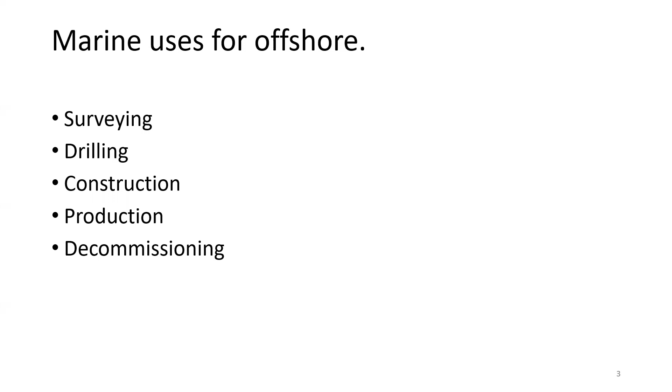These uses result in physical presence and physical disturbances. Physical presence, where physical objects associated with offshore projects consist of a range of surface and subsurface structures and vessels. Surface structures may include drilling units, semi-subs and jackups, drill ships, fixed platforms, FPSO vessels, floating storage and regasification units, and floating liquefied natural gas facilities.

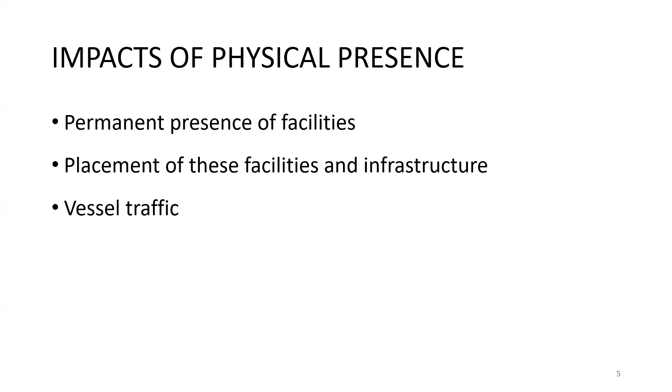Subsea infrastructure may include pipelines, risers, flow lines, umbilicals, manifolds, and Christmas trees. And vessels, project-related vessels, may include survey vessels, seismic, geotechnical, barges, tugs, support heavy lift and anchor handling vessels, and intervention vessels, and trenching and pipe laying vessels.

So the impact of physical presence, right? Permanent presence of facilities or infrastructure. Impacts may occur from the permanent presence of facilities and infrastructure over the life of a development and during removal of infrastructure during decommissioning.

Placement of these facilities and infrastructure may require anchoring to the seabed, or in the case of a fixed structure such as a platform, installation of foundations, either of which would result in the temporary or permanent loss of habitat.

Vessel traffic may be present throughout a project and may include a range of movements to and from a project area. The increase in vessel traffic may increase the risk of collision and obstruction to others.

The potential environmental impacts and risks associated with the physical presence of vessels and equipment include increased suspended sediments and sedimentation, disturbance to or loss of benthic seafloor habitat and associated biota, creation of artificial habitat and/or modification of existing habitats, introduction of marine invasive species, and disturbance to marine archaeology.

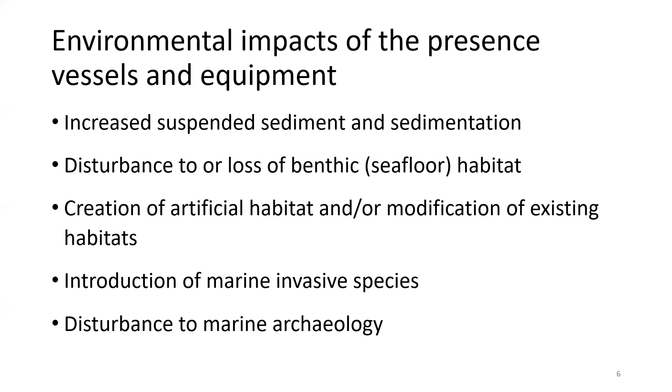Disturbance to migration, feeding, and breeding patterns of species, and deviations to migration pathways; visual aesthetics impacts to seascape resulting in social and cultural impacts; vessel interaction with marine fauna, for example vessel strikes, and interaction with other marine users that may lead to potential displacement.

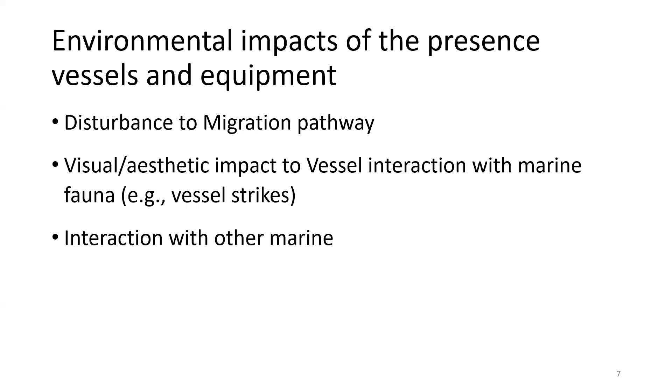So mitigation management measures, right? Mitigation management measures and performance standards applicable to the management of physical presence include considering sensitive marine habitats and life cycle periods for relevant species and communities during the site selection and design stages.

Undertake benthic habitat surveys to identify sensitive habitats and biota, and where feasible, avoid these areas, and minimize physical footprint where feasible.

Consider potential impacts for offshore structures. At an early stage, consider potential impacts for offshore structures, both positive and negative.

In some cases, restoration may be needed to assist the recovery of damaged or destroyed habitat, or offset considered. Examples are the introduction of artificial or transported habitats, reefs, and the relocation of individual coral colonies.

Dynamic positioning: consider dynamic positioning on drill rigs to avoid or minimize the need for anchors. Develop exclusion zones in consultation with key stakeholders, including local fishing communities. Raise awareness of exclusion zones with all stakeholders.

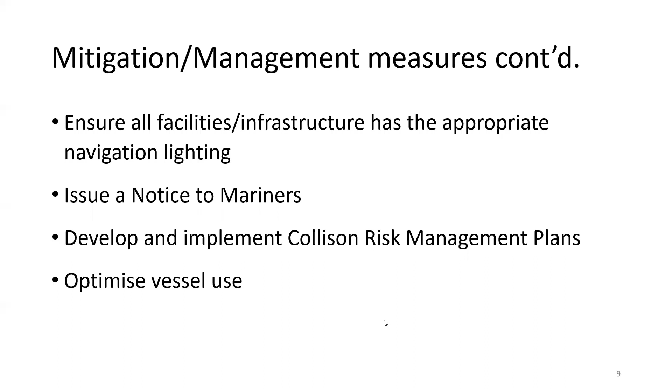Physical disturbance: dredging, trenching, and rock dumping. Dredging and pipeline trenching involve the removal of sediments and debris, typically during the construction, installation, and commissioning phases of the project. Maintenance dredging can also be required over a project's life cycle, most likely in small quantities.

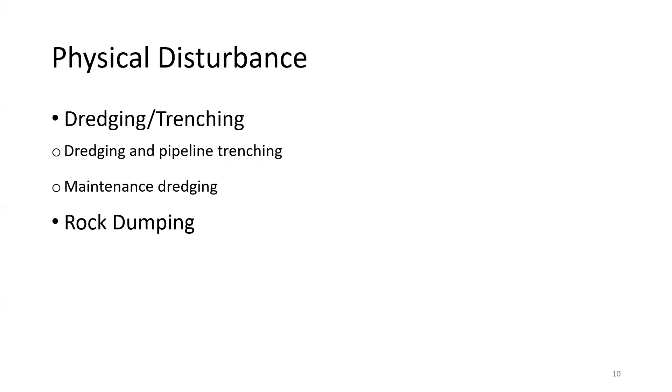The material collected during dredging is known as spoil and is usually disposed of offshore. Methods include grab dredging, backhoe dredging, trailing suction hopper dredgers, water injection dredgers, and seabed leveling.

Dredging can occur in a diverse range of environments involving a range of sediments. In areas remote from pollution sources, sediments are unlikely to contain contaminants, while in ports and harbors adjacent to urbanized or industrial areas, sediments may contain high levels of contamination from metals, hydrocarbons, and synthetic organic compounds.

Some marine environments are also more sensitive to dredging impacts and require a higher level of protection, for example coral reefs and/or fish nurseries.

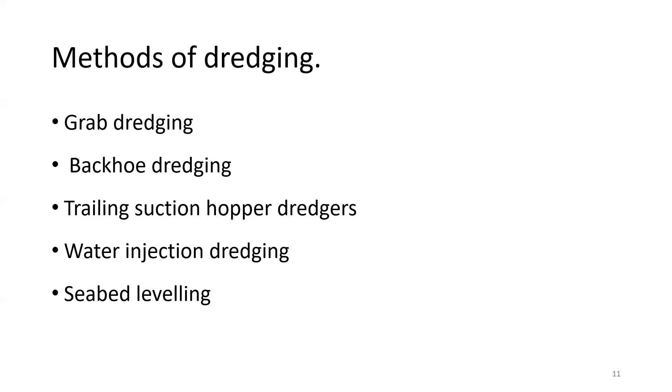Dumping. What is dumping? Dumping is a method used to stabilize or protect pipelines, or may be used to stabilize locations for placement of jackup rigs.

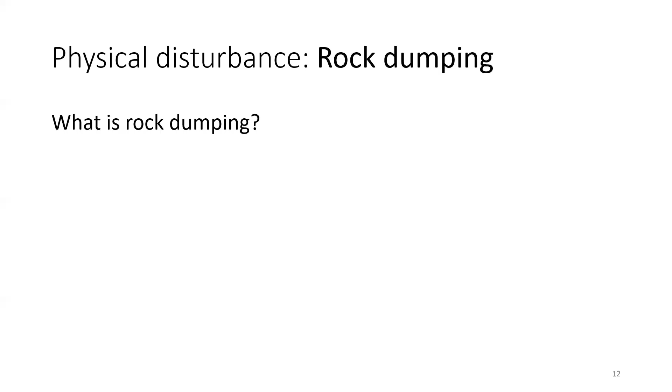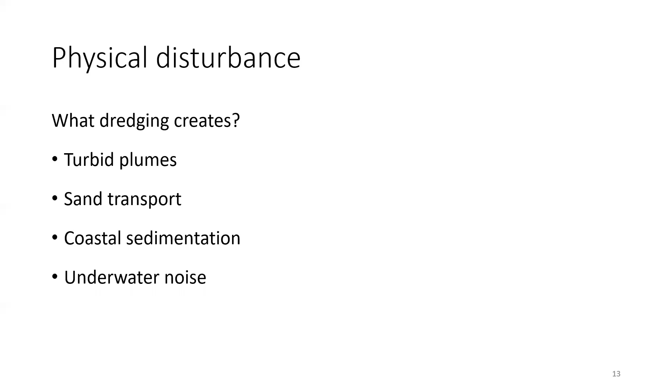Dredging, trenching, dumping, and the offshore disposal of dredge spoils creates turbid plumes, sand transport, coastal sedimentation, and underwater noise.

The potential environmental impacts and risks associated with physical disturbances include habitat modification, removal, and destruction of sensitive marine habitats, increase in suspended sediments resulting in the burial of sessile flora and fauna, and interfering with local prey and altering the movement of larval fish.

Increase in sedimentation or placement of materials, resulting in burial of sessile flora and fauna, alteration of the hydrodynamic processes, reduced productivity of fisheries, and noise impacts.

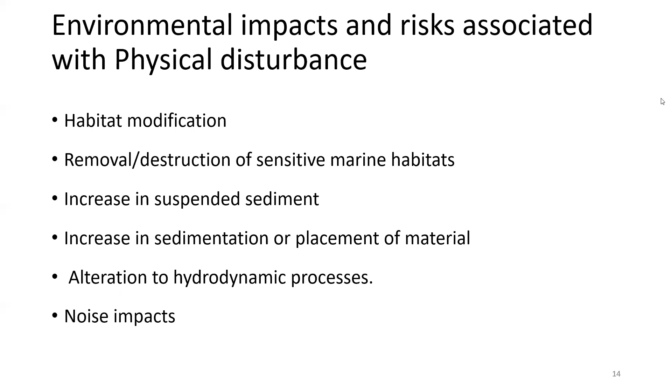So some mitigation methods include considering sensitive marine habitats and life cycle periods for relevant species when determining the placement and timing of dredging zones during the site selection and design stage.

Reduce footprint, footprint duration, and volume of dredging, rock dumping, and dredge disposal to the minimum required.

Establish a dredge management plan that outlines measures to minimize impacts and suitable management responses when trigger values for marine water quality are exceeded, and develop plans for exclusion zones in consultation with key stakeholders, including local fishing communities. Raise awareness of exclusion zones with all stakeholders, and obtain permits for approved disposal routes.

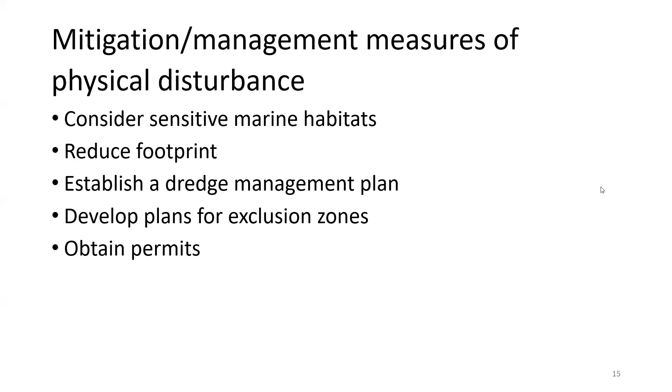Okay, so emissions. Emissions such as acoustic emissions are emissions that are underwater noise and underwater vibrations.

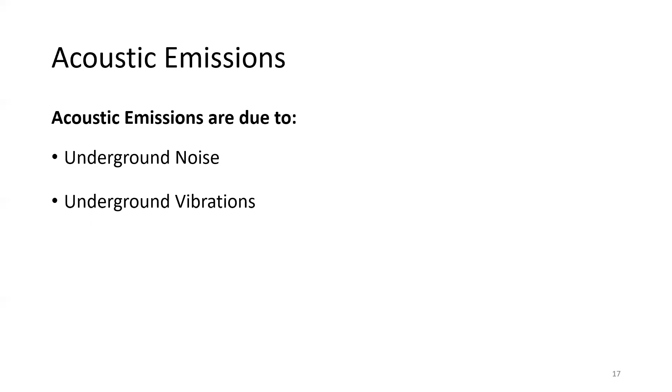Underwater noise in the oil and gas industry comes from exploration. This is where noise is generated from seismic survey and geophysical surveys. This creates high energy pulses of low frequency sound.

Construction. This is the noise created due to piling, dredging, and trenching.

Drilling and production. This is the noise generated due to ground vibration when setting up offshore rigs, such as semi-submersible rigs, jackup rigs, and drill ships. Drill ships make the most noise compared to platform rigs. Mechanical vibration is also created due to drilling underwater.

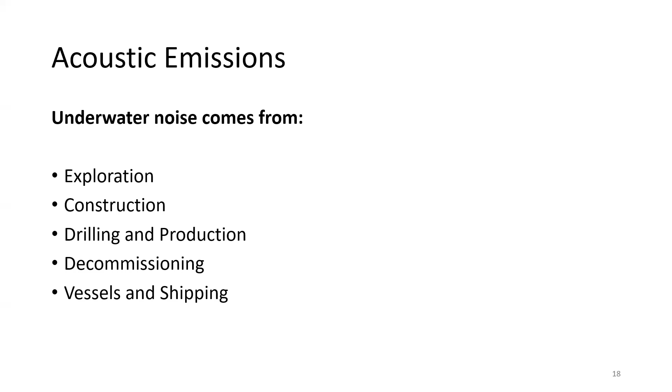Decommissioning. This is the noise created by vessel propulsion and positioning. Vessels and shipping. This is noise generated by machinery on the vessel, such as generators, engines, pumps, etc.

The environmental impact to marine fauna due to underwater noise includes behavioral changes. These are changes that include temporary changes in swim behavior or direction, cessation of vocalization, changes to breathing, and changes to migratory regimes. Auditory interference - masking or interfering with other biologically important sounds such as communication, echolocation, and sounds produced by predators or prey.

Auditory impairment - permanent or temporary impairment to hearing organs.

Mitigations of acoustic emissions are: consider sensitive locations and time of year when planning seismic activity, utilize marine mammal observers for sensitive species in the area, use passive acoustic monitoring in highly sensitive areas, and use soft start procedures for piling operations and dredging.

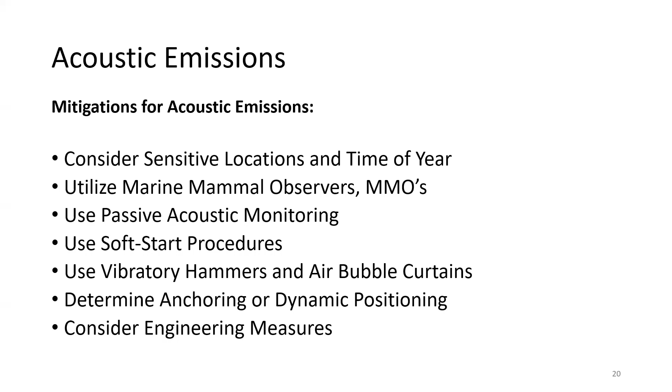For pile driving, consider the use of vibratory hammers and air bubble curtains. Assess whether anchoring or the use of dynamic positioning would be more appropriate for maintaining a ship's position. Consider engineering measures to minimize operational noise emissions.

So now I'll go to combustion emissions. Combustion emissions occur from offshore activities such as electric power generation, machine drivers for compression and pumping, gas flaring, vessel activity, and helicopters.

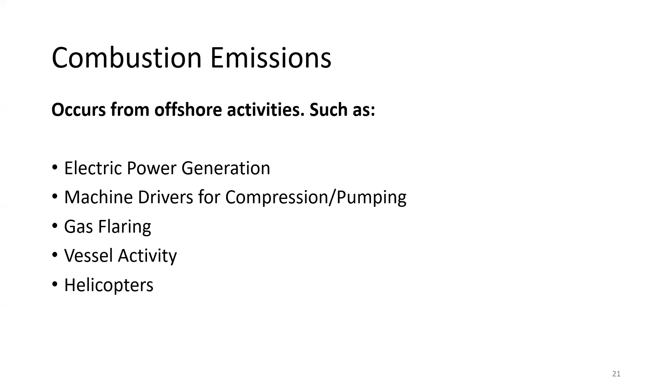Environmental impacts are due to carbon dioxide, which is a greenhouse gas that contributes to climate change and ocean acidification. Nitrogen oxides contribute to acid rain and may also contribute to ozone formation when mixed with volatile organic compounds in sunlight. Nitrous oxide is a greenhouse gas that contributes to climate change.

Sulfur dioxide contributes to ocean acidification and acid rain. Carbon monoxide can be oxidized to carbon dioxide, but is primarily a local air pollutant that can be toxic at high concentrations. Methane is a greenhouse gas that contributes to climate change. It also contributes to low-level ozone formation.

Volatile organic compounds, or VOCs, can promote the formation of photochemical oxidants and contribute to climate change.

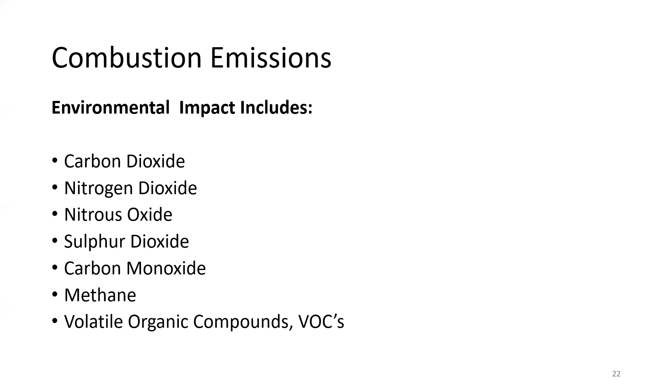Mitigations for combustion emissions are the use of high efficiency equipment to minimize power demand, life of field planning, selecting low sulfur diesel, and power generation plants incorporating low emissions technology as a standard. Small combustion process installations should be designed to meet the emissions guidelines. Integration of renewable energy sources into developments.

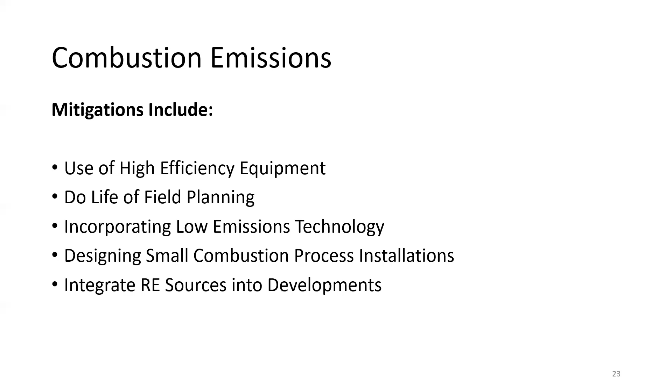Consideration of electrification versus direct drive when designing projects. Do regular plant maintenance, and implement emissions control devices on vehicles and machinery.

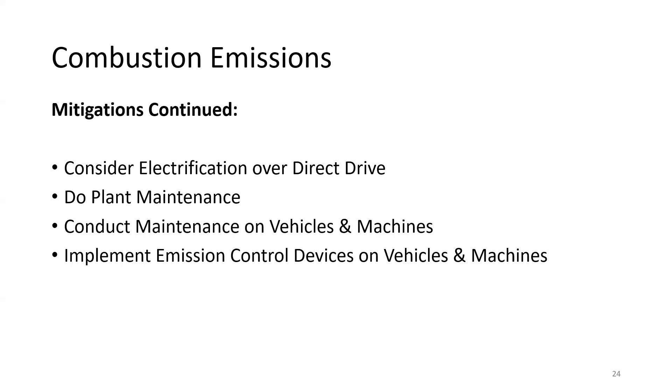Next I will go to fugitive emissions. These include emissions targeted by operating facilities as part of their leak detection and repair survey programs, with particular focus on valves, flanges, pumps, connectors, and compressors. The environmental impact contributes to global warming, since most fugitive emissions are methane.

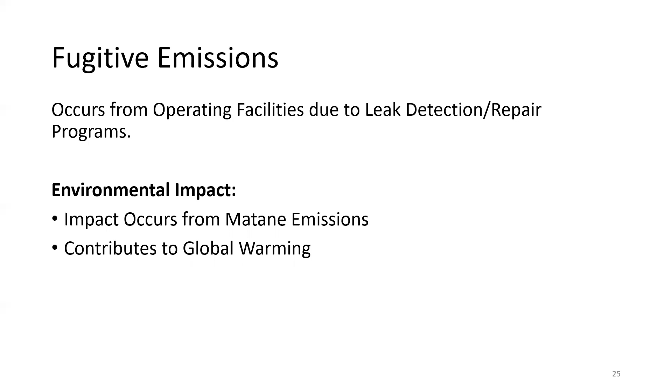Mitigations for fugitive emissions include selection of appropriate valves, flanges, fittings, seals, and packings, considering equipment safety and suitability requirements, as well as their capacity to reduce gas leaks and fugitive emissions, implementation of effective and regular leak detection and repair programs, and ensuring new systems or processes do not use chlorofluorocarbons.

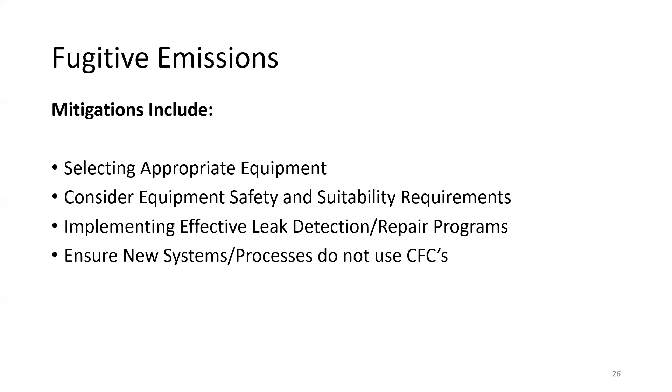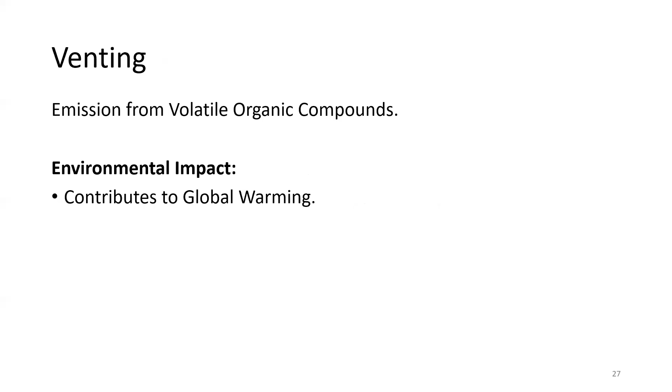Next, I will go on to venting. These are emissions from volatile organic compounds, or VOCs. The environmental impact is emissions from venting, which contributes to global warming.

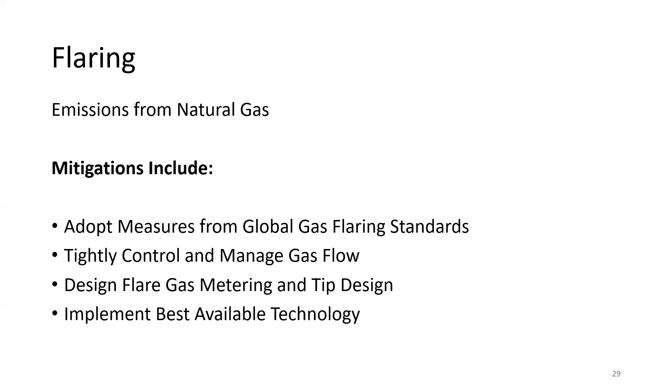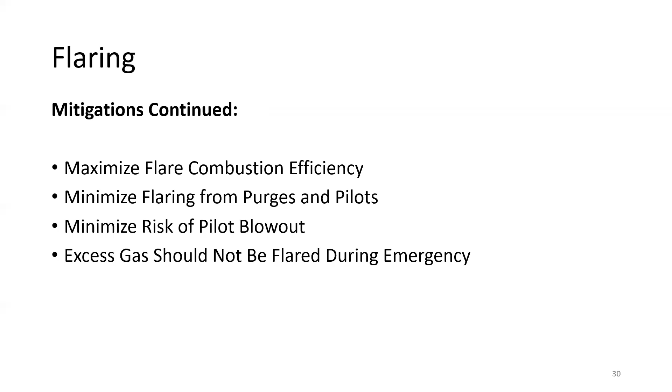Minimize flaring from purges and pilots. Minimize risk of pilot blowout by ensuring sufficient exit velocity and providing wind guards. In the event of an emergency or equipment failure, excess gas should not be flared, but sent to an efficient flare gas system. I will now pass you on to Justin Sinat, who will discuss offshore discharges.

Hi, good day. I'll be doing offshore discharge, so let's get to it. Next slide.

So we have sewage, grey water, and food waste. This can be found in showers, toilets, and kitchen facilities. The effects on the environment can include changes to ambient water quality. This can increase the BOD, the biological oxygen demand, biostimulation of planktonic communities, and biological exposure to pathogens, which can also decrease water quality and decrease sediment quality due to sediments and solid food waste.

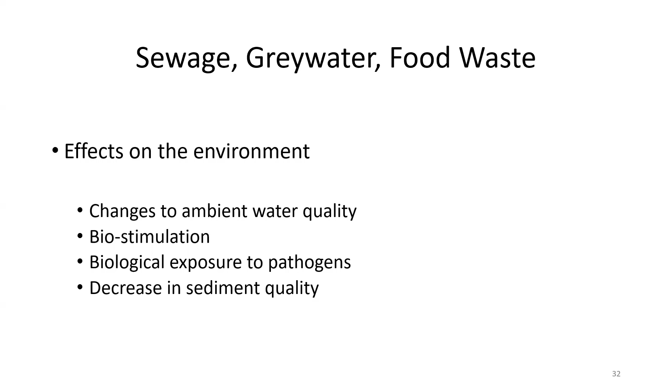So the mitigation: water should be treated according to MARPOL Annex 5. And the sediments in the food waste especially should be less than 25 millimeters before discharging into the marine environment.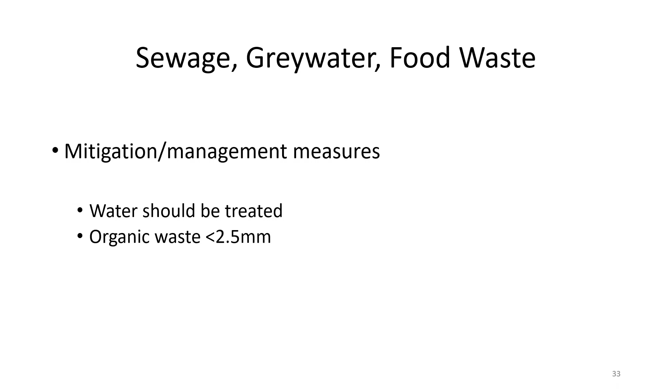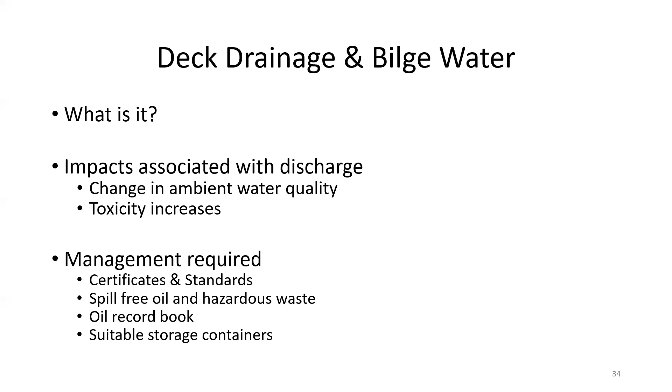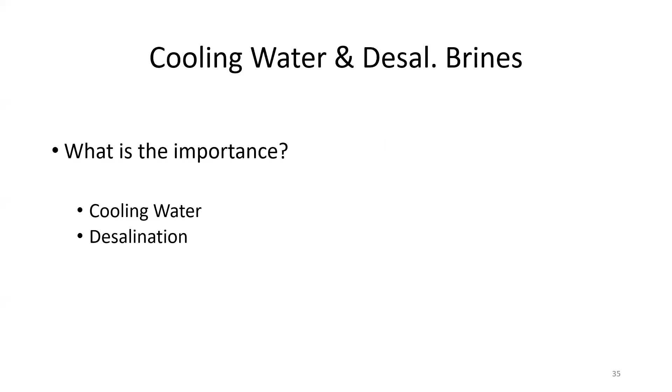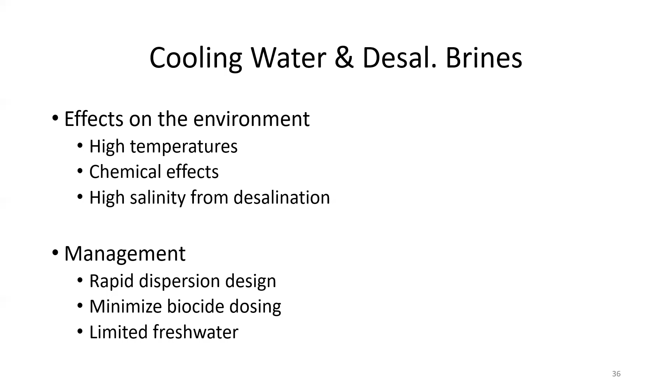Management: we have rapid dispersion designs, so when designing systems, we want to make sure that when released into the environment, it is dispensed and dispersed into the sea quickly to not cause accumulation. We want to minimize biocide dosing and limit freshwater use, meaning we don't want to use water that we don't need, so just have the desalination plants running to purify water that is needed on the platform.

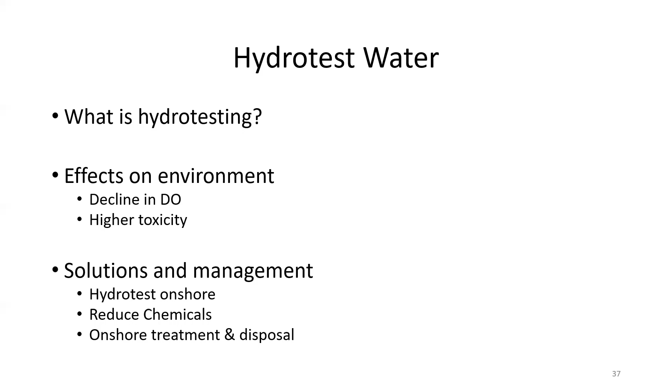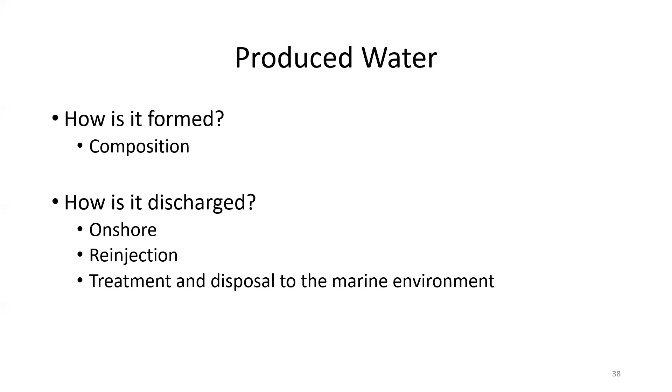How is it discharged? We can store produced water and send it onshore, or re-inject it into the well to help with production, or treat and dispose of it to the marine environment. Sometimes we can treat it offshore and dispose of it in the marine environment.

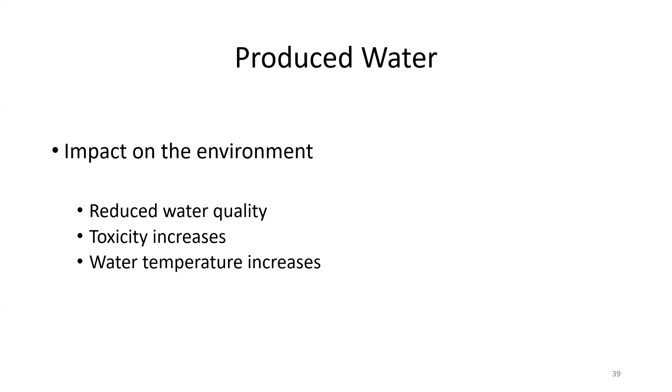As we said earlier, we can recycle by re-injection into the well. For disposal techniques, we have different methods, and they must meet guidelines for disposal - the World Bank EHS guideline for offshore oil and gas development, or the EU hydrocarbons BAT guidelines, whichever is necessary at that process.

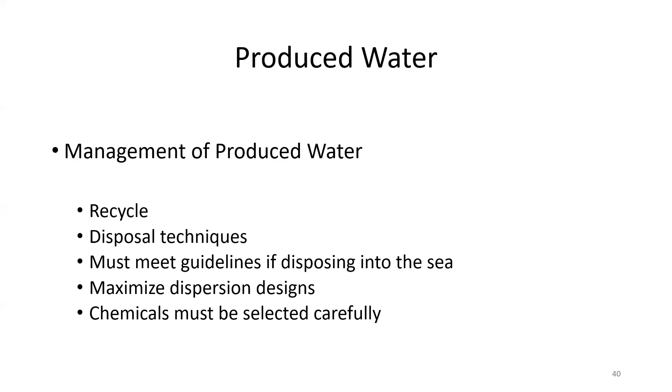We want to maximize dispersion here again, and chemicals must be selected carefully, so that we use chemicals that are environmentally friendly and will not alter the flora and fauna in the environment.

Ballast water is used for stability in drill ships during drilling. IMS occurs - IMS is introduced marine species. This is when ships taking on water can take in species. A ship can take in water at point A and release it at point B, thus releasing species from point A into point B.

To manage this, we ensure vessels are compliant with local regulatory authority guidelines, and all ships have to manage their ballast water and sediments in tanks. This will help to minimize IMS occurring.

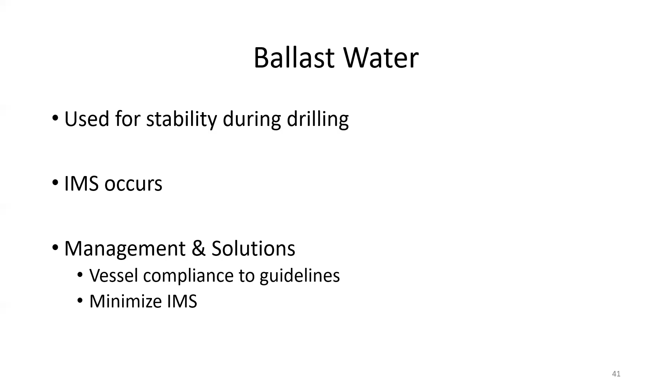Produced sand and scale: sand is produced from the reservoir when separated from formation fluid during hydrocarbon processing. This can result in NORM - naturally occurring radioactive material - which is a contamination we don't want, including uranium, thorium, potassium, radium, and radon. As we know, anything radioactive is very devastating to the environment, so we don't want this in the environment.

However, if it gets into the environment, these are some of the effects: subsea disturbance, increased toxicity due to the radioactivity, and reduced water and sediment quality. Because of the sand, it can have oil residue, thus increasing the oil and grease content of the water.

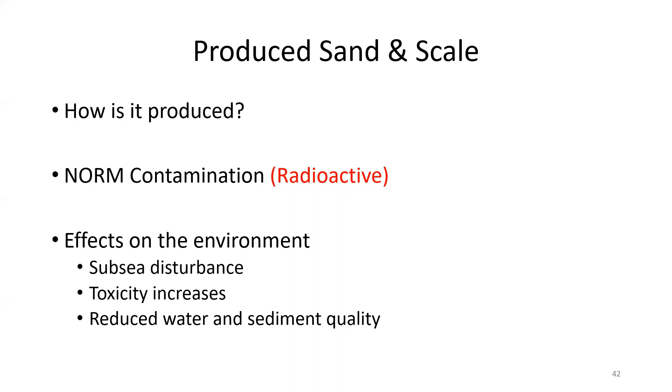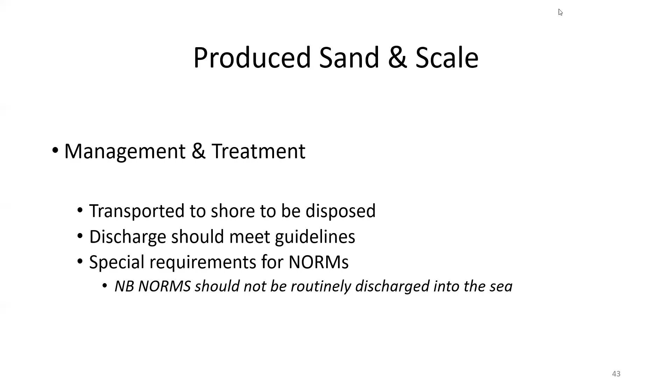Management: we want to try our best to transport this waste to shore for disposal. Under no circumstances do we want regular discharging into the sea, because this can greatly affect the flora and fauna. Discharge should meet the guidelines of the World Bank's EHS guidelines for offshore oil and gas 2015, or EU hydrocarbon BAT guidance.

Drill and discharge: we have three types of discharges in drilling - drilling cuttings, drilling muds, and cements.

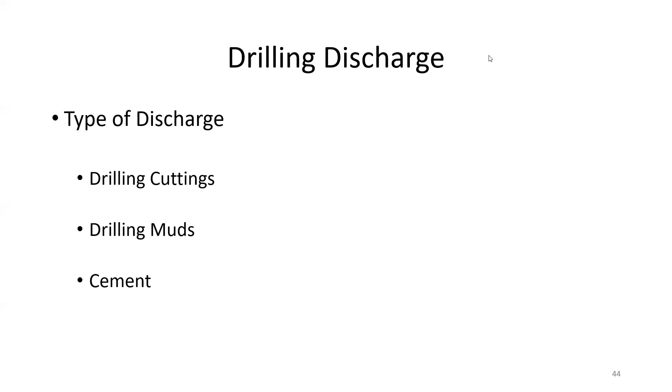So we have the environmental impacts. Drilling muds and cement especially can increase the turbidity of the water.

Increasing turbidity decreases light penetration, thus changing the flora and fauna below the subsurface. Because of the turbidity increase and light decrease, it smothers the benthic community, therefore altering the sediment. Cement in particular will sink to the bottom and cause sediments to be altered and change.

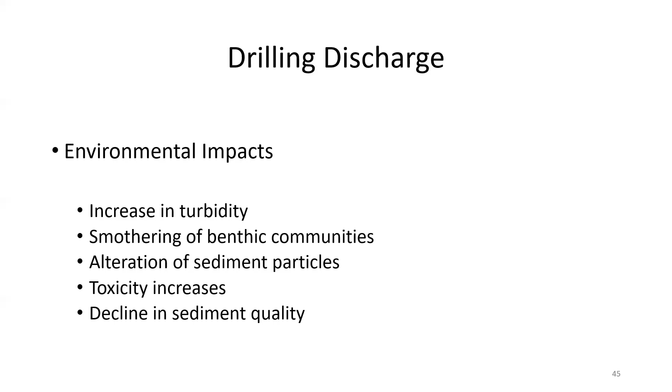Toxicity increases due to the chemical impacts of oil-based muds, if that's what was used. Cement also has a lot of chemicals that can increase toxicity, and there's a decline in sediment quality due to settling and cement being around the area.

Next, for management measures, we can have calculated amounts of drilling cuttings and fluids. We want to store cuttings to be disposed of either onshore or separated out offshore. And for fluids, we want a calculated amount so we don't have a lot being wasted and dispensed out into the sea.

Same as with the cement, we want a calculated amount, and we want to select the appropriate drilling fluid. We don't want to use an oil-based fluid when we could use a water-based fluid, so it's as environmentally friendly as possible.

We have recover and store oil-based mud. After using oil-based mud, we don't want to dispense this into the sea just yet. We have to put this through a system of separating out the oil, and then we can discharge only if necessary. So, solid control techniques.

We have equipment on board to drill that can break up the sediment into smaller pieces and minimize the sediment before it is dispersed into the sea. Only if necessary do we want to dispense this oil-based mud into the sea.

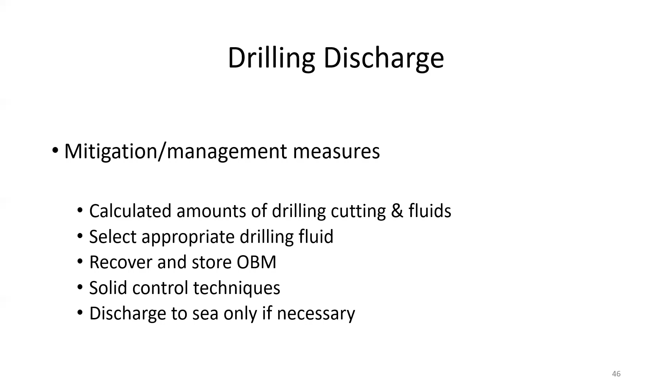Different types of processes cause offshore waste. We have processes and production chemicals. A variety of chemicals may be used during processing and production, such as subsea control fluids, completion fluids, and well workover fluids.

During production, chemicals such as subsea control fluids are used to control subsea valves remotely from the facility. Subsea control fluids are typically water-based with additives of MEG, monoethylene glycol. It is widely used as a hydrate inhibitor in the oil and gas industry to reduce the risk of hydrates forming in pipelines that could cause blockage.

For flow assurance and hydrate inhibitor purposes, large volumes of MEG are required to control the hydrate formation condition in pipelines, along with lubricants, corrosion inhibitors, biocides, and surfactants.

Subsea control systems can be either open or closed loop systems. Where open loop systems are employed, typically small volumes of fluid are discharged to the marine environment intermittently. Where closed loop systems are employed, fluid discharges to the marine environment do not occur under normal operating conditions.

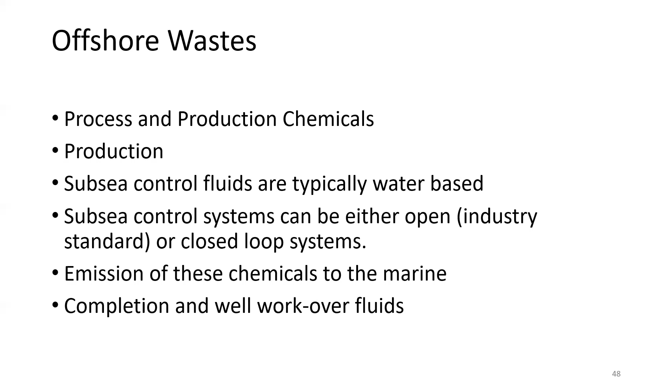Some mitigation measures used: selection of control fluid, choosing a water-soluble, low-toxicity control fluid, and selection of chemicals based on OSPAR and HMCS. Chemicals to be used and discharged offshore are selected based on the Oslo and Paris Conventions, OSPAR, or Harmonized Mandatory Control Scheme, HMCS.

If using a closed system, collect the fluids handled in closed systems and ship them to shore for recycling, treatment, and/or disposal, or injection into a disposal well where available.

If discharging to the sea, select chemical systems in relation to their concentration, toxicity, bioavailability, and bioaccumulation potential, with a preference to OCNS, Offshore Chemical Notification Scheme, Group E, or PLONOR, pose little or no risk to the environment chemicals. Consider routing fluids to the produced water stream for disposal or reinjection if available.

Neutralize spent acids before treatment and disposal. Ensure fluids meet the discharge levels for the different governing bodies, and design equipment to reduce the volume of fluid release.

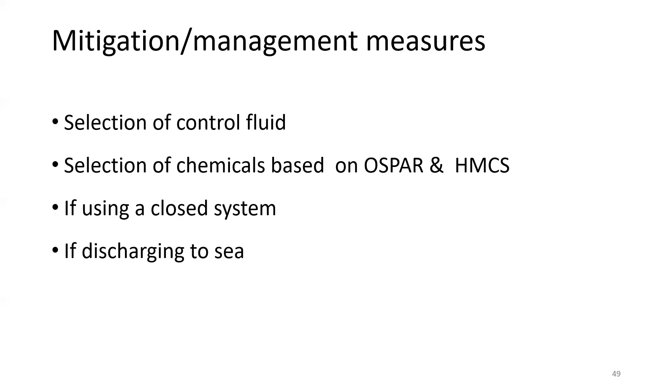Hazardous waste. What is hazardous waste? Hazardous waste is any waste that, if not handled, stored, or disposed of in an appropriate manner, presents a significant risk to health, safety, and the environment. Hazardous wastes are normally disposed of in an appropriate manner, which would only enter the marine environment in the event of an accident, loss, or spill.

Hazardous waste generated during all phases of a project may include, but are not limited to, recovered solvents, excess or spent chemicals, paint, biological waste from medical facilities, oil-contaminated materials, batteries, fluorescent light tubes, waste oil, mercury removal absorbents, and contaminated containers used for storage of hazardous material.

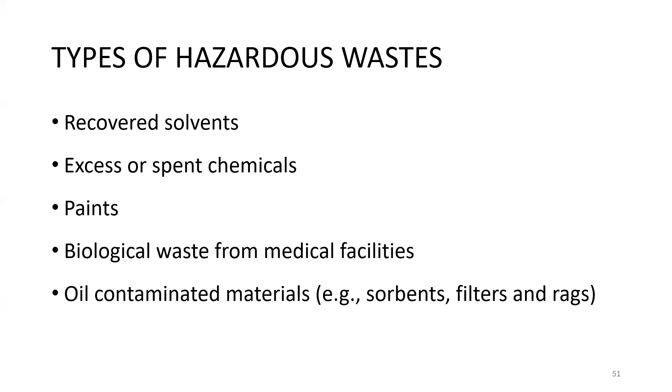Impacts of hazardous waste. The level of impact from a discharge is dependent on the nature, volume, and location of spill release, as well as its behavior in the marine environment. Example: settlement to the seabed or rapid dispersion.

The potential environmental impacts associated with the accidental discharge of hazardous waste includes temporary and localized reduction in water quality and resulting toxicity effects to marine flora and fauna. Settlement of non-buoyant material on the seabed, resulting in direct localized impacts to benthic habitats and localized alteration of geomorphical seabed features. Release of buoyant material potentially impacting marine fauna due to entanglement, ingestion, and smothering.

Some mitigation measures include segregation of hazards: segregate hazardous waste in hazardous waste skips and drums, or holding tanks for liquid waste, prior to disposal. Hazardous waste should be managed, handled, and stored in accordance with their SDS, their safety data sheet, and tracked from source to their final destination at appropriately licensed waste facilities.

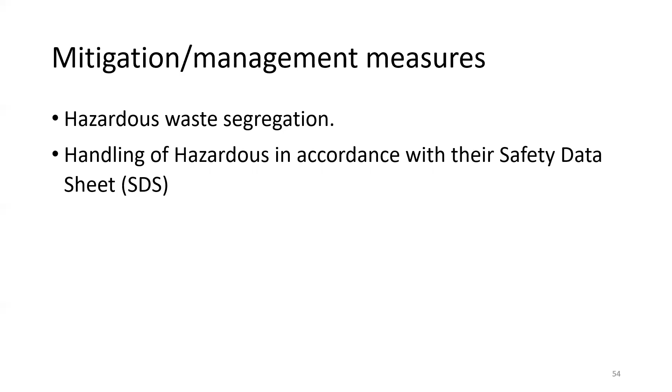Non-hazardous solid waste. General non-hazardous solid waste is generated through all phases of the oil and gas life cycle through normal operations. Types of non-hazardous waste include paper, rope, cardboard, sacking, timber, scrap metal, domestic packaging, food and drink containers, etc., and plastic. How does it enter the sea?

It enters the sea from inadequate storage or disposal procedures, resulting in environmental impact from the accidental loss of waste into the ocean. Example: wind blowing lighter materials such as paper or plastic into the ocean.

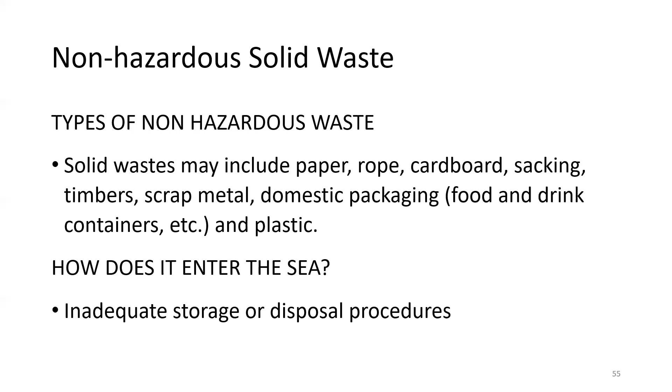The effects of accidental discharges of solid waste are dependent on the nature of the material involved. The potential impacts associated with solid waste are ingestion of objects, including waste, by marine fauna and avifauna, potentially leading to injury or death, and entanglement of marine fauna in plastic or other solid waste, potentially leading to injury or death.

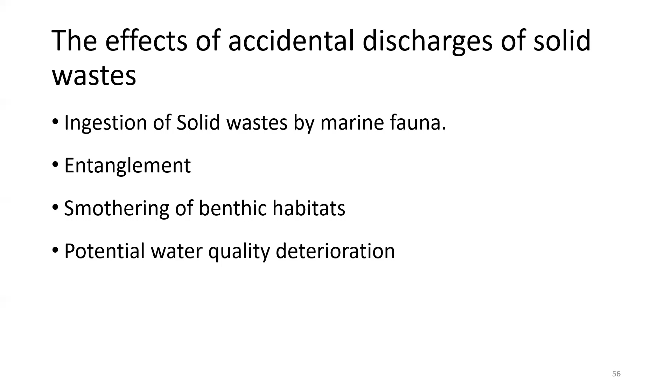Smothering of benthic habitats: physical contact and potential smothering of benthic habitats, which relates to the habitats at the bottom of a body of water. Potential water quality deterioration within the direct vicinity of the source, resulting in behavioral changes in marine species.

Some mitigation methods include: non-hazardous solid waste to be managed in accordance with MARPOL 73/78 Annex 5 requirements, which states that harmful substances shall be properly stored and secured so as to minimize the hazards to the marine environment without impairing the safety of the ship and persons on board.

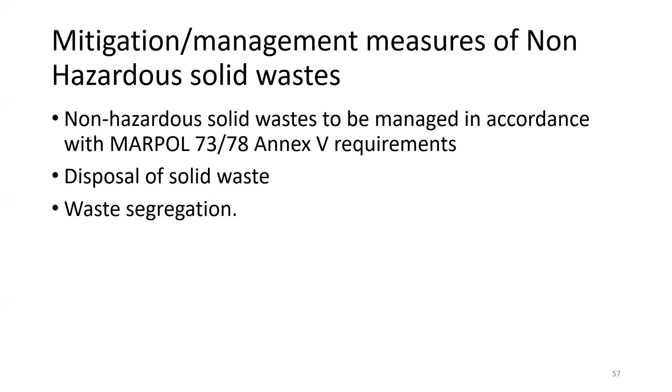Disposal of solid waste: no planned offshore disposal of solid waste should be employed. Waste segregation: waste is to be segregated at source into recyclable and non-recyclable waste, where net environmental benefit is likely, and stored in marked containers for transport onshore to a recycling contractor wherever practicable, or a waste disposal site if available. I now pass you over to Sanjeev to talk about unplanned events.

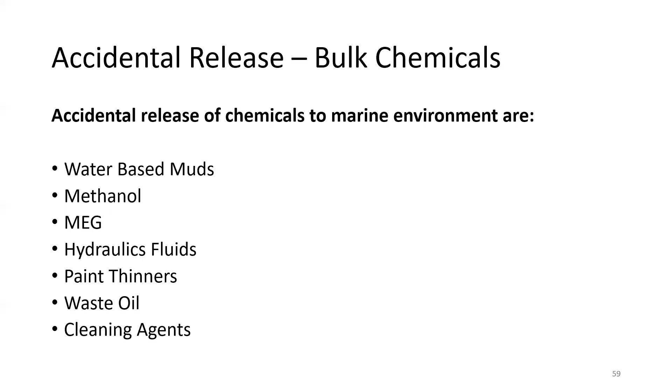In unplanned events, we have accidental release of bulk chemicals. Accidental release of bulk chemicals to the marine environment include water-based muds, methanol, MEG, hydraulic fluids, paint thinners, waste oil, and cleaning agents. Potential impacts of chemical spills to the marine environment are temporary localized decline in water quality, temporary localized decline in sediment quality, and temporary minor toxicity to marine flora and fauna.

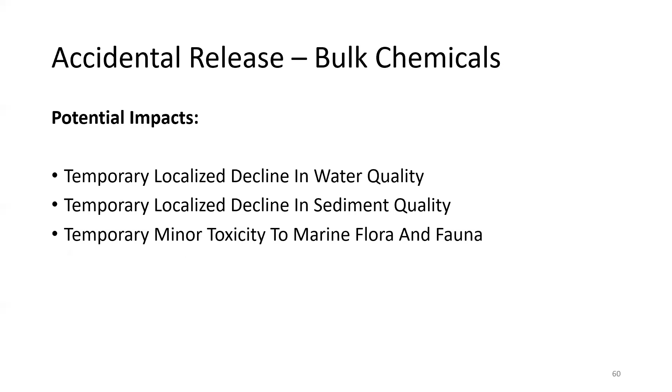Mitigations for chemical spills include: vessels must have a valid International Oil Pollution Prevention certificate, must have a shipboard marine pollution emergency plan, and comply with stowage requirements for vessels and drilling units carrying harmful substances in package form. Chemicals should be stored in secure designated areas with secondary containment.

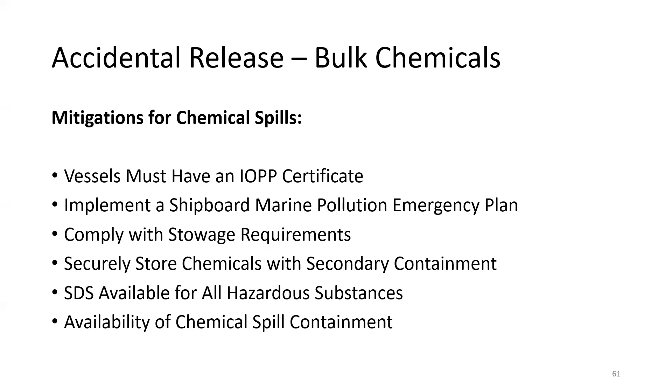SDS should be available on board for all hazardous substances. Chemical spill containment and recovery equipment should be available near chemical inventories. Chemical transfer should be undertaken in suitable weather conditions, and should comply with facility or vessel lifting and drilling fluid procedures.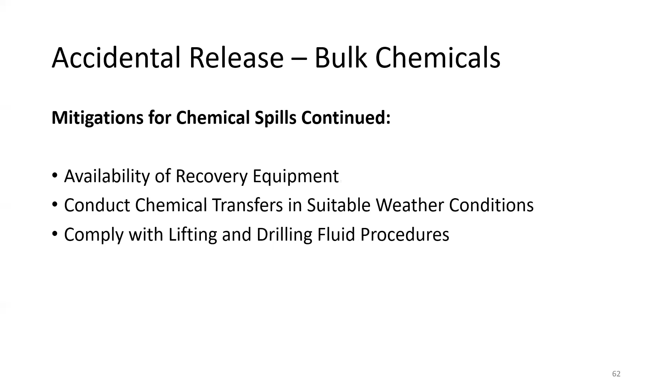Moving on now to spills due to vessel collision, tank, and pipeline rupture. These spills are caused by vessel collision, tank, and pipeline rupture, and are due to navigational error, vessel loss of power, and foundering due to weather.

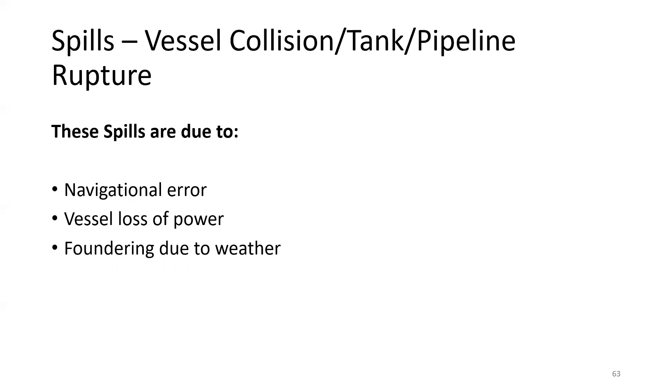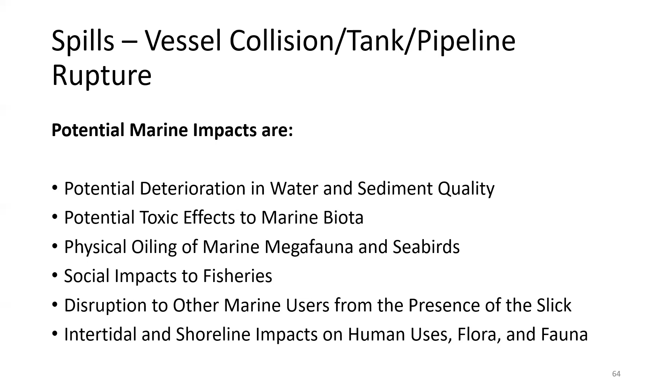The potential marine impacts include potential deterioration in water quality and sediment quality, potential toxic effects to marine biota, physical oiling of marine megafauna and seabirds, social impacts to fisheries, disruption to other marine users from the presence of the slick, and intertidal and shoreline impacts on human uses, flora and fauna.

Mitigations. These vessel mitigations include implementing safety exclusion zones for relevant vessels or facilities, vessel-specific controls aligned with MARPOL 73/78, which includes managing spills on board, emergency drills, waste management requirements, and having in place an SOPEP. Vessel movement must comply with maritime standards such as COLREGS and SOLAS.

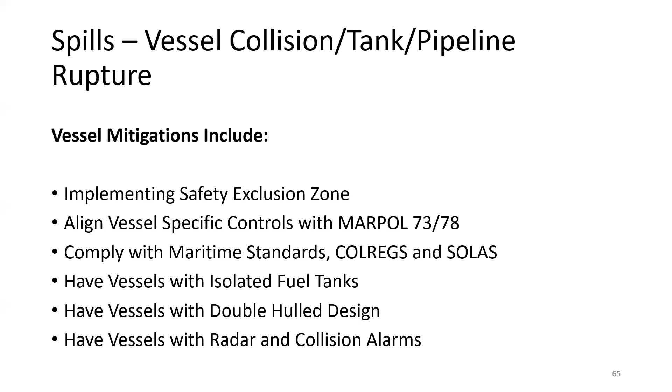Select vessels that have isolated fuel tanks and have a double hull design. Have vessels with radar on board fitted with a collision alarm. Have vessels that can maintain appropriate lighting, shapes, navigation, and communication systems at all times.

Pipeline mitigations include hydrotesting to be undertaken prior to commissioning to ensure there are no leaks in the pipeline. Pipelines to be stabilized and protected through trenching and burial and deployment of rock armor as necessary. Monitoring of subsea equipment to be undertaken, including through periodic intelligent pigging operations, monitoring of corrosion and corrosion protection systems, periodic inspections using side scan sonar and remotely operated vehicles.

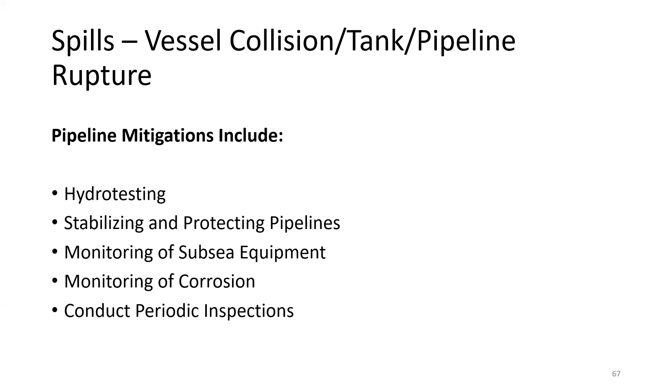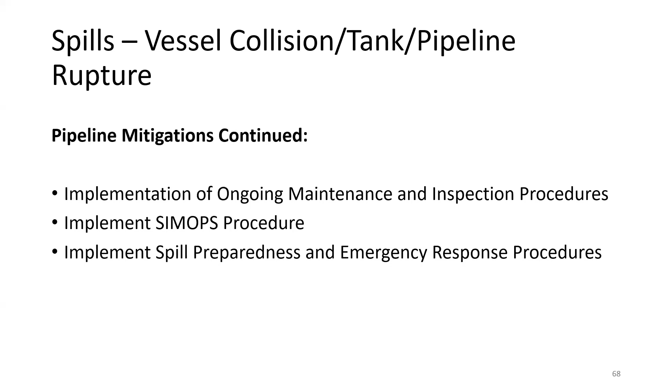Implementation of ongoing maintenance and inspection procedures, simultaneous operation procedures to be implemented, and spill preparedness measures and emergency response procedures in place.

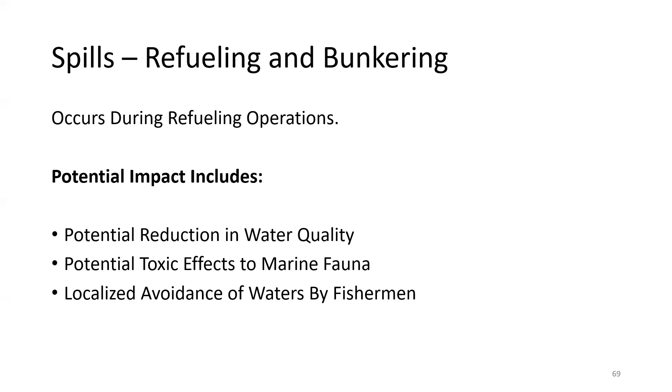So now I will go on to what is called spills that occur due to refueling and bunkering. These are small hydrocarbon spills that occur during refueling operations. Potential impacts include potential reduction in water quality, potential toxic effects to marine fauna, and localized avoidance of water by fishermen.

Mitigations include conducting port refueling where practical. Refueling at sea must be conducted by trained personnel using defined procedures, conducting regular inspection of transfer hose integrity, continuously monitoring tank levels to prevent overflow, and using dry break or breakaway couplings where available and practical. All vessels must include an SOPEP and oil spill response measures.

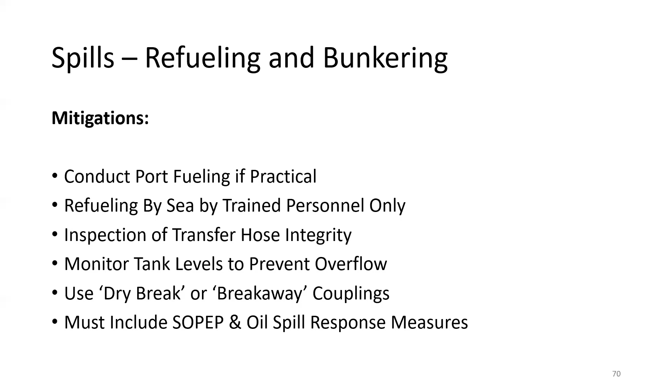So now I will go on to major spills from exploration and production facilities. This is due to loss of well control, which contributes to large oil spills.

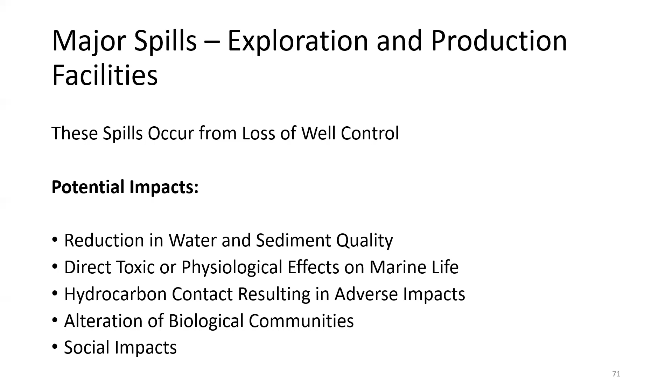Potential impacts include reduction in water and sediment quality, direct toxic or physiological effects on marine life, hydrocarbon contact with banks, reefs, and islands at concentrations that result in adverse impacts, alteration of biological communities as a result of effects on key marine biota, and social impacts on marine archaeology, commercial fishing, traditional and subsistence fishing, tourism, recreation, scientific research, health, and commercial shipping.

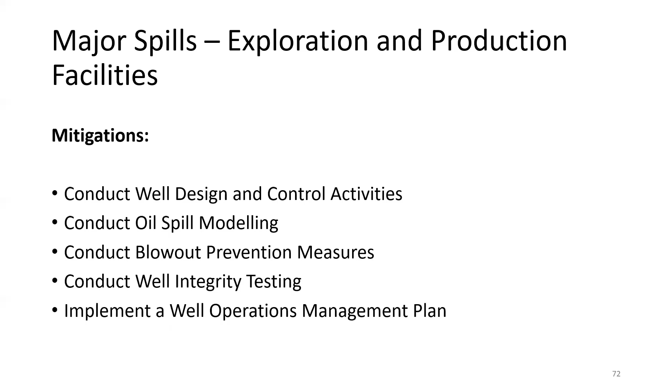Mitigations include conducting well design and control activities in line with industry's best practice standards, oil spill modeling to determine potential impact to the surrounding environment, blowout prevention measures focused on maintaining wellbore hydrostatic pressure, conducting well integrity testing, implementing a well operation management plan and well control contingency plan, installing a certified blowout preventer, implementing well isolation barriers and well intervention procedures, having emergency and spill response measures in place, and conducting ongoing maintenance and inspection procedures.

I will now go on to collision with marine fauna. Potential impacts are potential blocking of feeding areas and migration pathways, and entanglement due to seismic vessel equipment.

Mitigations include monitoring for presence and movement of marine fauna, applying species-specific management actions to minimize adverse interactions, including no tangle gear attached to the streamers when using seismic equipment, creating plans for rescue and release of entangled animals, and employing an MMO to monitor marine fauna.

So I'll go on now to an introduction to invasive marine species. These species are microorganisms, small invertebrates, eggs, cysts, larvae of various species. Potential impacts include decline or extinction of species due to competing for space and food with native species, and decline or extinction of species due to predation of native species.

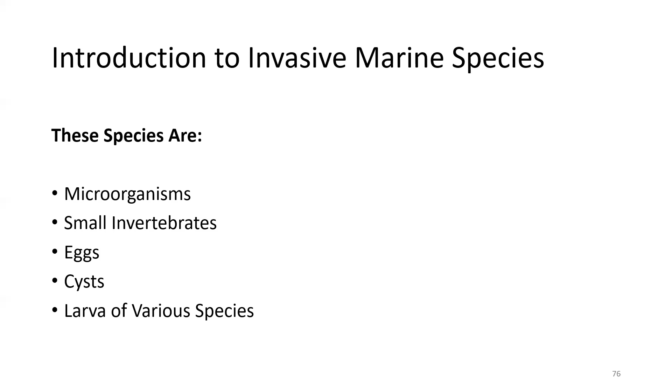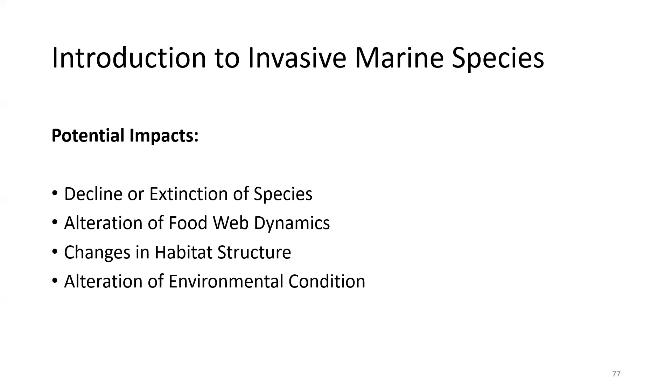Decline or extinction of species due to disease and pathogens, alteration of food web dynamics, changes in habitat structure, and alterations of environmental conditions. So those are the potential impacts.

IMS mitigations include developing an IMS management plan, controlling harmful anti-fouling systems on ships, ensuring vessels have an international anti-fouling system certificate, and conducting regular inspections of the hull.

And finally, we have ballast water mitigations: ensuring vessel compliance with local regulatory authority guidelines, managing ballast water according to ship-specific ballast water management plans. All ships must have a ballast water record book and an international ballast water management certificate.